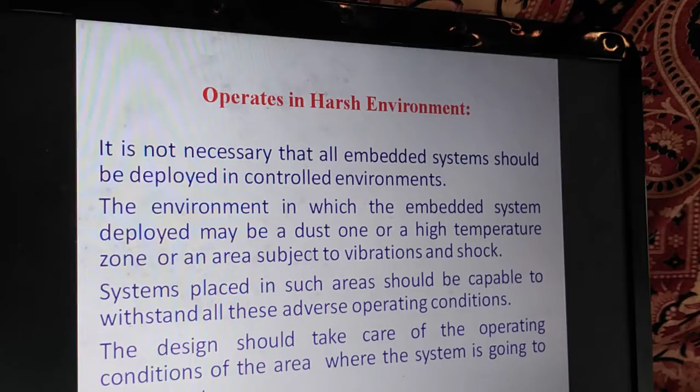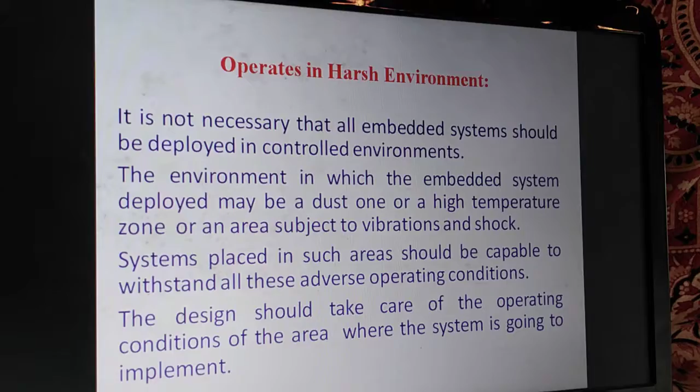Operates in harsh environments. So this is one example. Actually, this is applicable especially for automobiles. So in automobiles, most of the embedded parts we keep in harsh environments, or else in plants where we need to control the pressure, we need to control the heat of the furnace, we need to control the speed of the motors.

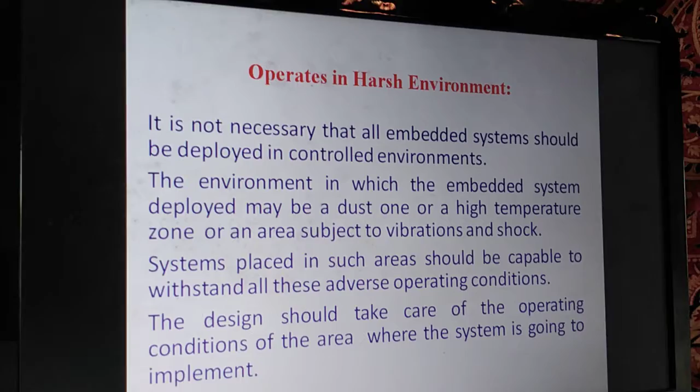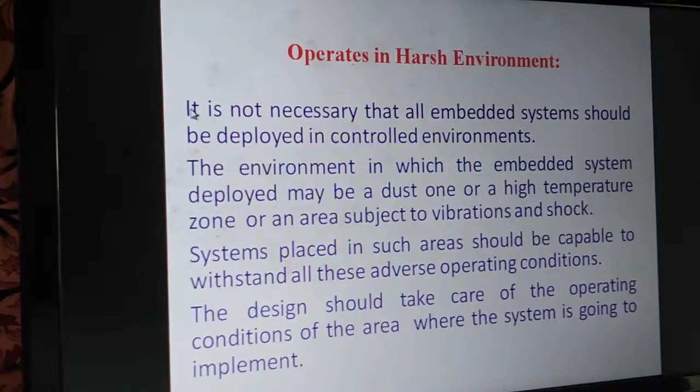In all these, they're all usually part of a plant or an industry. These are the examples of the harsh environment. That's the reason most of the time our embedded systems will be functioning in the harsh environment. That's the reason it should have a capacity to withstand those harsh environments.

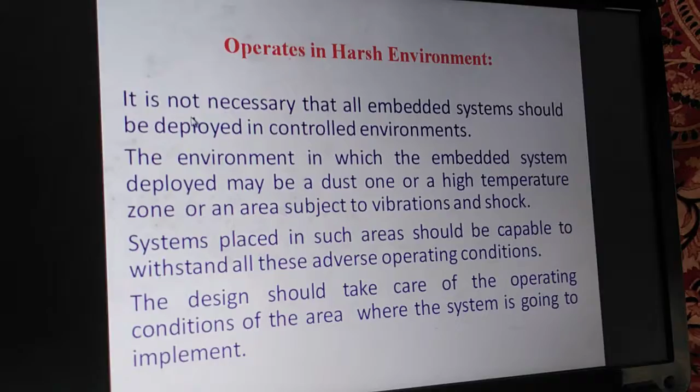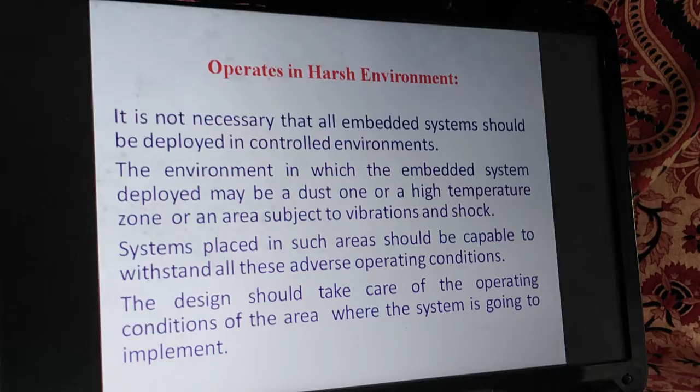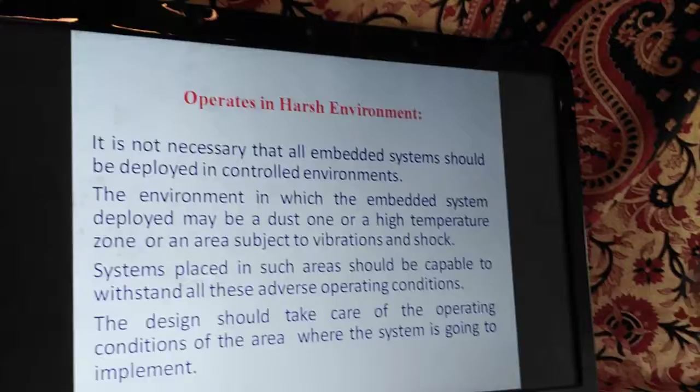It is not necessary that all embedded systems should be deployed in a controlled environment. Controlled environment is like a room environment. So usually computers we keep in a controlled environment where sometimes we can control temperature also. But for embedded systems it won't work.

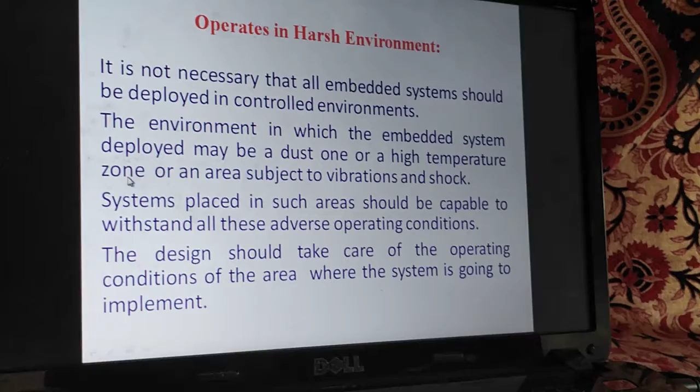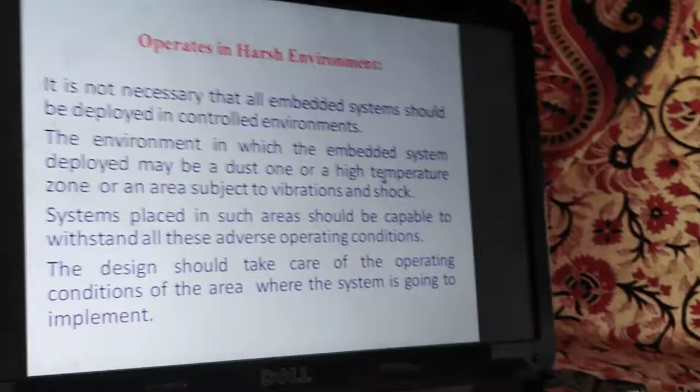The environment in which the embedded system is deployed may be a dusty one or a high temperature zone, or an area subject to vibration and shock. Dust is common in industries, high temperature is also common in industries as well as in automobiles, or subject to vibrations and shocks. These are all common in automobiles as well as in some moving parts of the industry.

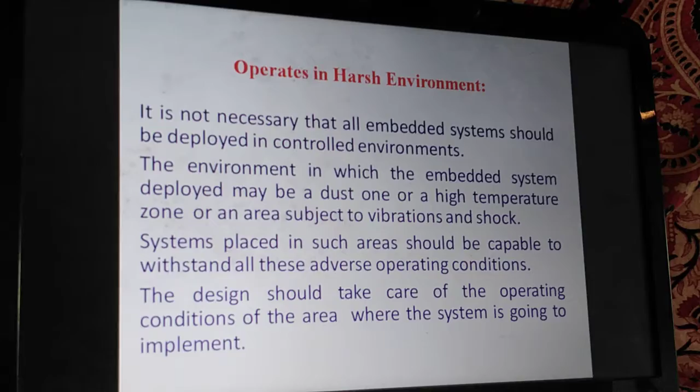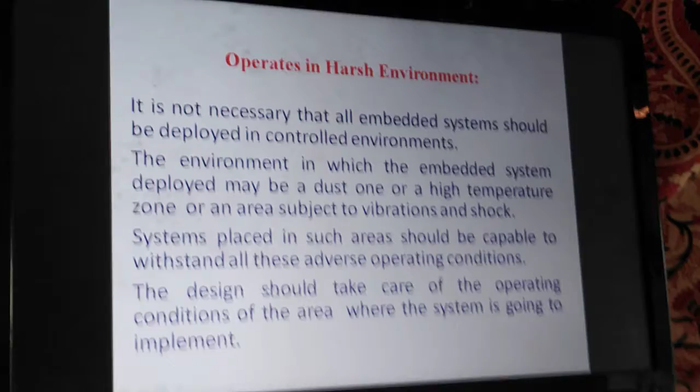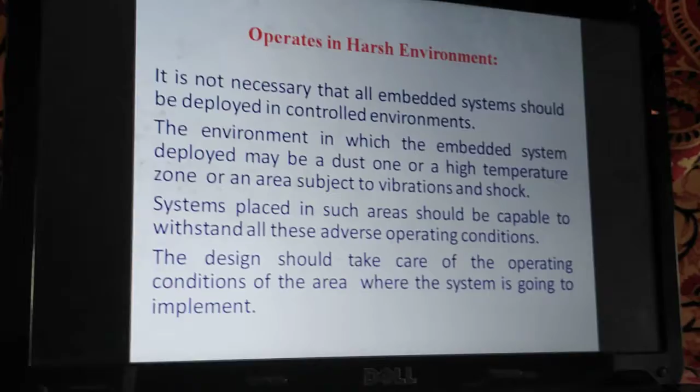Systems placed in such areas should be capable to withstand all these adverse operating conditions. The design should take care of the operating condition of the area where the system is going to be implemented. That's the reason when you are designing a system, we should make sure that in all these harsh environments, our system should work faithfully.

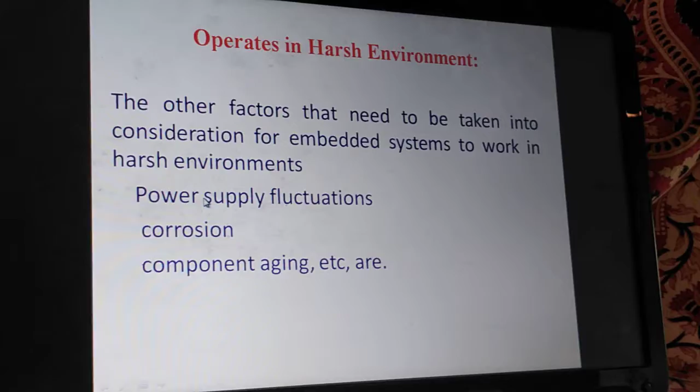For example, if the system needs to be deployed, the other factors that need to be taken into consideration for an embedded system to work in harsh environments is power supply fluctuation. Sometimes power may fluctuate, so small changes in the power should not change the functionality or the accuracy of our embedded systems.

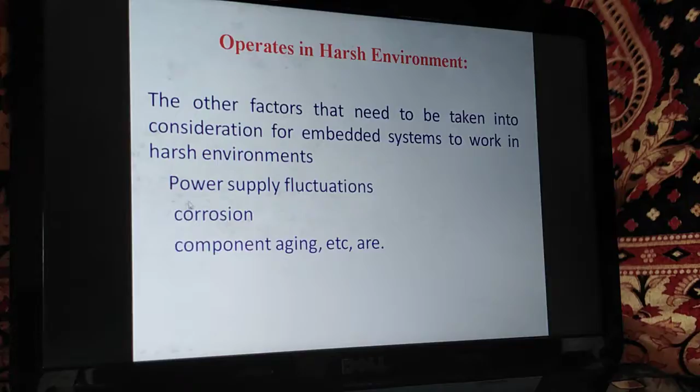For example, if it is an integrated circuits manufacturing company where they may be using several motors or several actuators, those actuators should work properly without any small errors, where accuracy is very important. Even power fluctuation should not cause any errors.

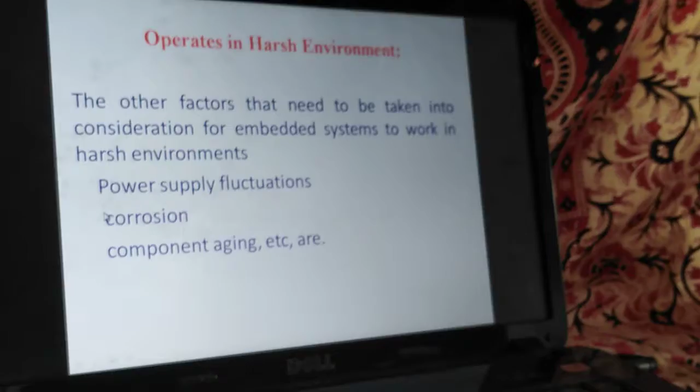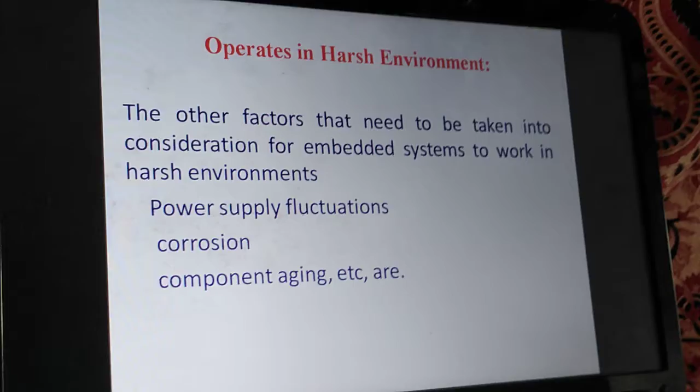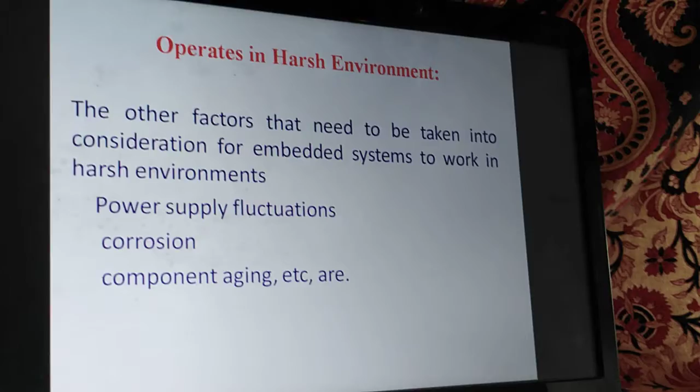Corrosive environments, these are common in ship-like systems, or else if the system is working in an outer area, if the system is kept in open air. Component aging, so all this it should consider.

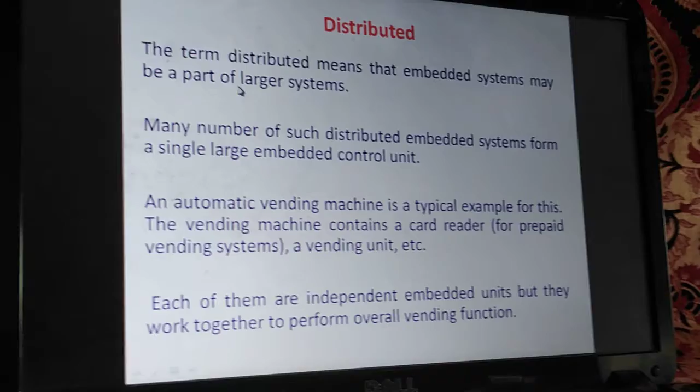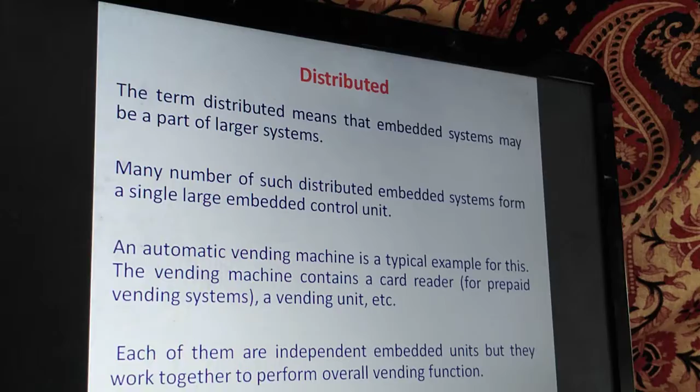Then distributed. The term distributed means that an embedded system may be a part of a larger system. Usually most of the embedded systems are distributed because they consist of several small embedded units. Many such distributed embedded systems form a single large embedded control unit. One control unit consists of several small embedded systems.

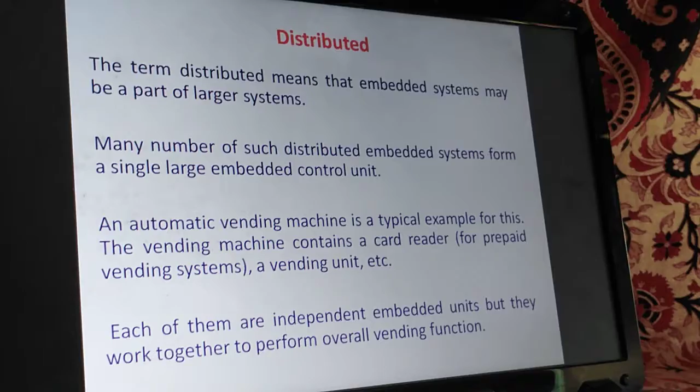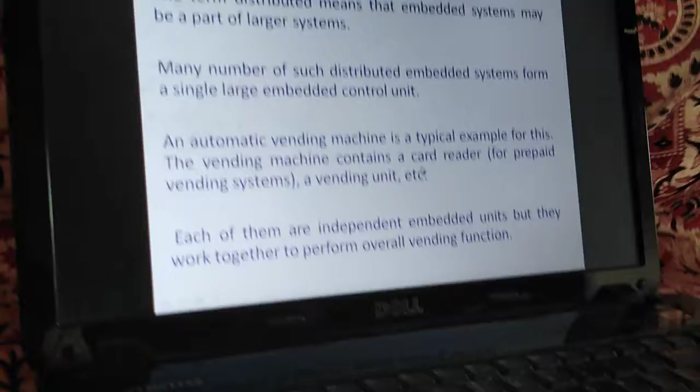An automatic vending machine is a typical example of this. This vending machine contains a card reader and a vending unit. If you consider the card reader as one unit and the vending unit as another, each of them are independent embedded units, but they work together to perform overall vending functions.

An ATM machine is also another example of a distributed system. A card reader embedded unit is responsible for reading and validating the user's ATM card. It consists of another unit called a transaction unit. It is responsible for performing transactions.

The currency counter for dispatching currency to the authorized person, and a printer unit for printing the transaction details. So we can say that an ATM machine consists of a card reader unit, transaction unit, currency counter, and printer. We can visualize these as independent embedded systems, but they work together to achieve a common goal.

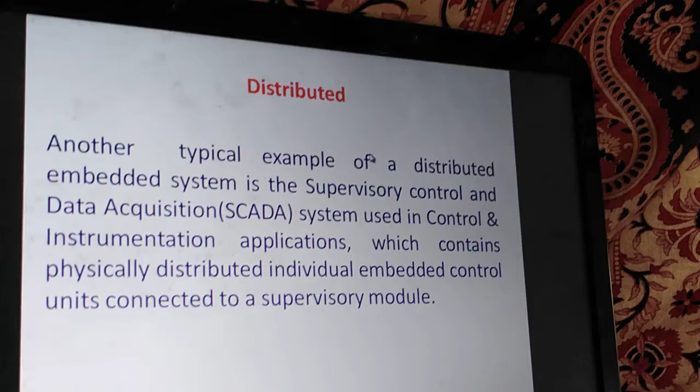Another typical example of a distributed embedded system is supervisory control and data acquisition systems used in control and instrumentation applications, which contain physically distributed individual embedded control units connected to supervisory modules. Several sensors are connected to one control unit.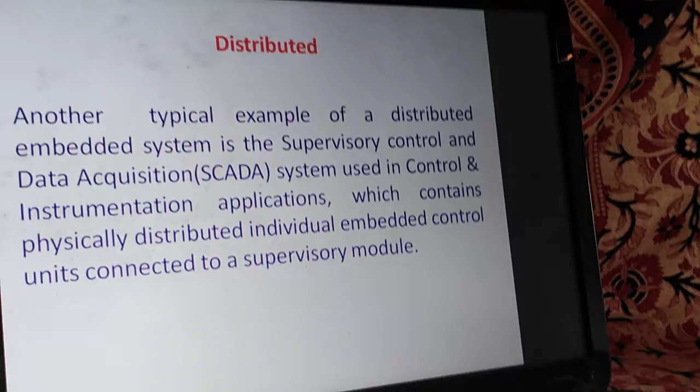That is also one of the processors, and several processors are connected to one main processor. This main processor we use for supervisory modules to implement supervision, and several small processors connected to several small sensors are used to implement small distributed individual embedded units.

So one good required characteristic: an embedded system should have a small size and less weight. Product aesthetics is an important factor in choosing products. These are common in mobile or handheld embedded devices. When you plan to buy a new mobile phone, you may make a comparative study on the pros and cons of the products available in the market.

Definitely the product aesthetics, size, weight, shape, style, etc. will be one of the deciding factors to choose a product. People believe in the phrase small is beautiful. Generally, the points we are talking about here are business points. People expect a mobile to have a small size and less weight, and it should be small for that particular functionality, in shape and style, etc.

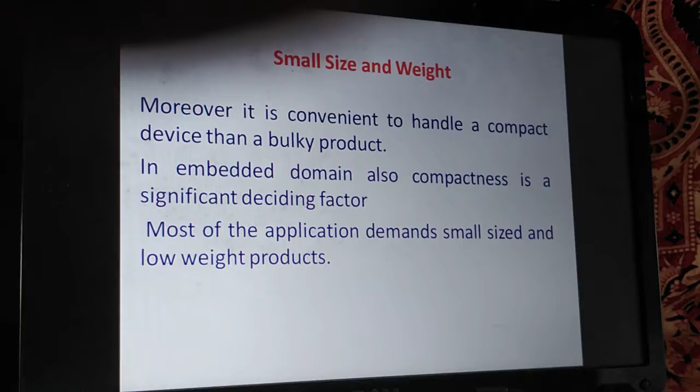Moreover, it is convenient to handle compact devices rather than a bulky product, because for most handheld devices we expect them to be compact. Not only handheld: printer size is reduced, copier machine size is reduced, and camera size is also reduced. For example, with a camera we expect high functionality with small size and less weight.

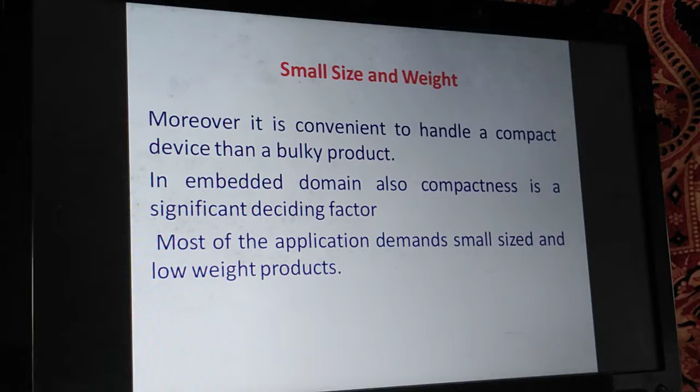In the embedded domain also, compactness is a significant deciding factor. Most applications demand small size and low weight products. Power concern: power management is another important factor to consider in designing embedded systems. For example, in a mobile, power management is very important because battery size is also a very important parameter. We need to reduce the battery size, so a separate power management is required to use the power efficiently.

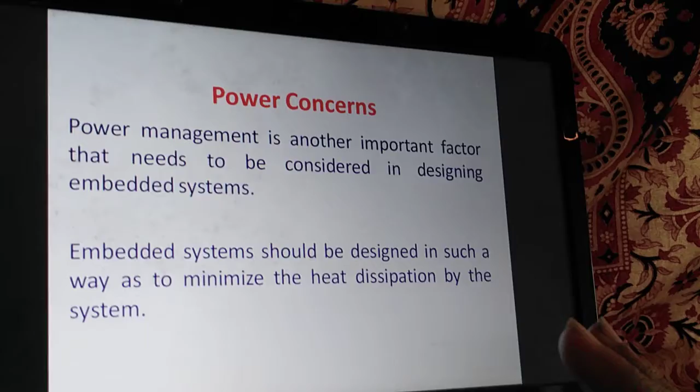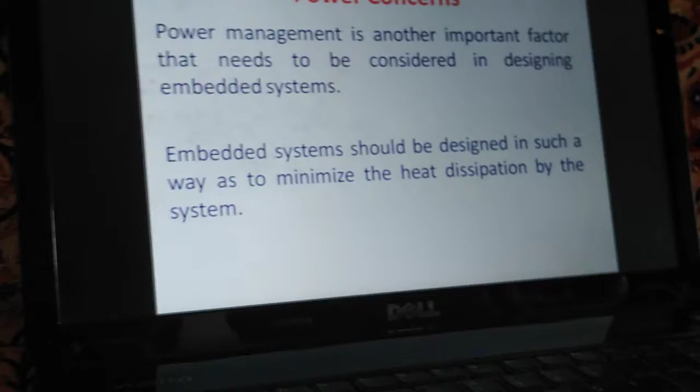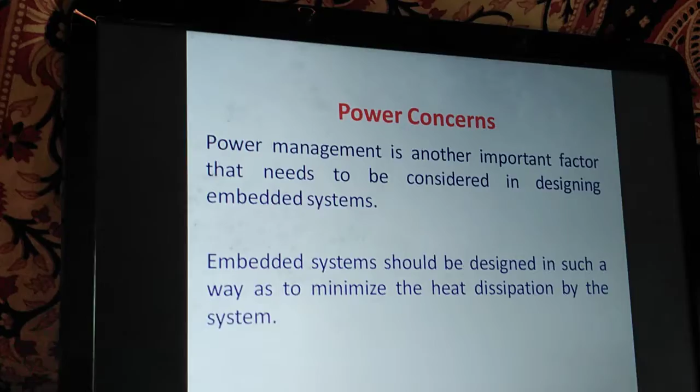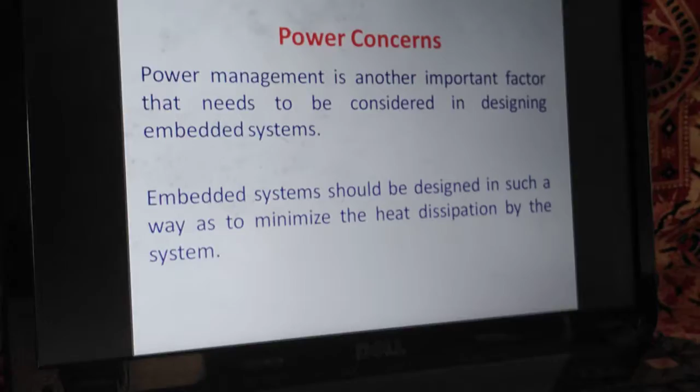Embedded systems should be designed to minimize heat dissipation. Heat is the biggest problem in all embedded systems. We should design our system so that minimum heat is dissipated. If minimum heat is dissipated, the heat sink requirement is less, the fan requirement is less, and the cooling arrangement required will definitely be less if the heat generated by the embedded system itself is less. That's why an embedded system should be designed to minimize heat dissipation by the system.

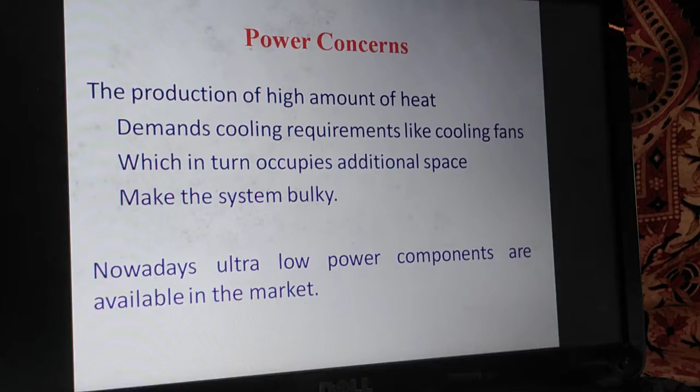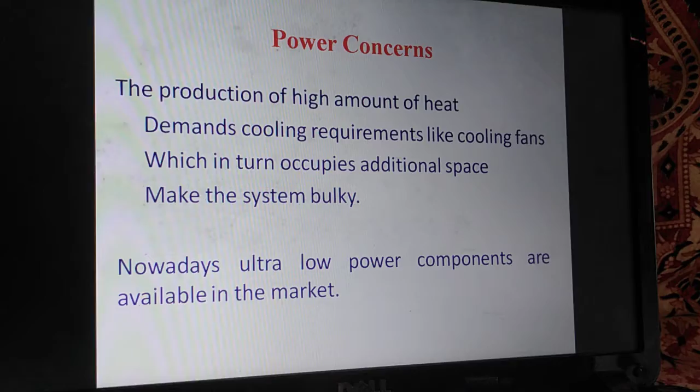Production of a high amount of heat demands cooling requirements like cooling fans, which in turn occupy additional space and make the system bulky. So we should always reduce heat dissipation so that we can reduce cooling requirements. In turn, it will reduce the additional space of our embedded systems. In mobile phones, nowadays size is reducing because heat dissipation in modern designs is very low.

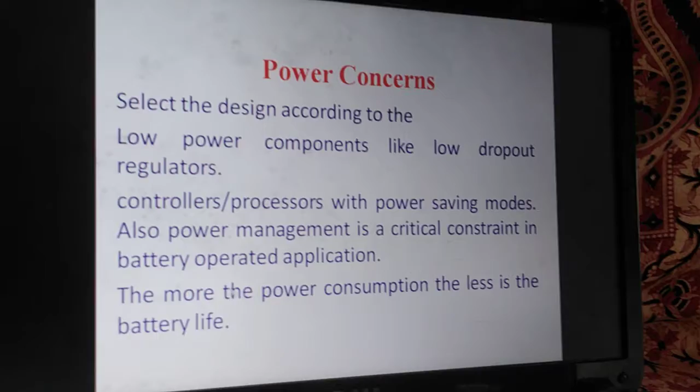Nowadays, ultra low power components are available in the market. Select the design according to low power components like low dropout regulators, controllers, and processors with power saving modes. Most processors and controllers nowadays work in two or more modes, one of which is a power saving mode. It is very useful because whenever we are not using embedded systems like mobile phones, we usually keep them in power saving mode.

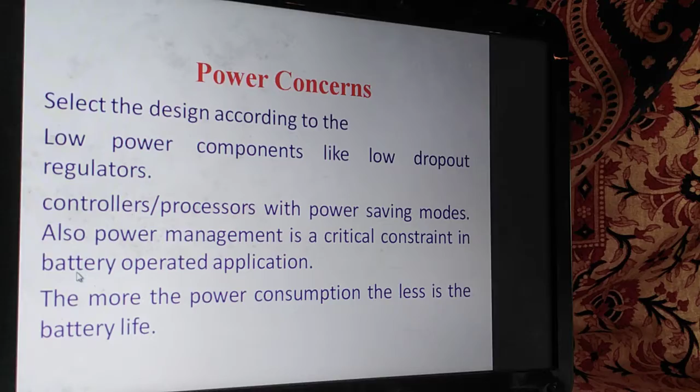So power management is a critical constraint in battery operated applications, because battery lifetime is very important, as is power backup. With less power we want to run the system for a longer duration. That's why power management is a critical constraint. The more the power consumption, the less the battery life.